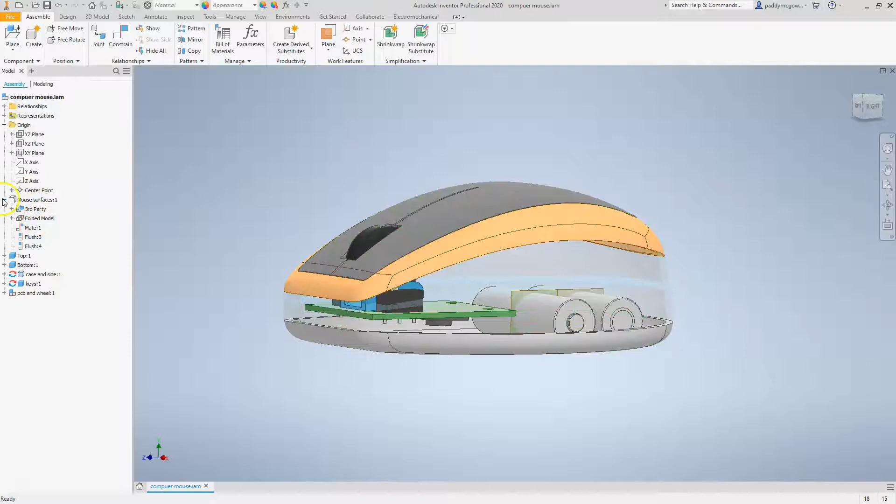You could do it for anything. So just happens that for this one I've got some 3D geometry in there and I've split it apart. But you could just use a master model to share locations for screw bosses, or whatever your project is. It's quite easy and straightforward to add a derived part of a component into another one. I'll show you how to do that because it's quite powerful, and you never know, you might use it in some of your projects.

So let's go into our mouse surfaces here. Let me just hide this off. Oh sorry, I didn't open it. And in here, we've got all our parts split.

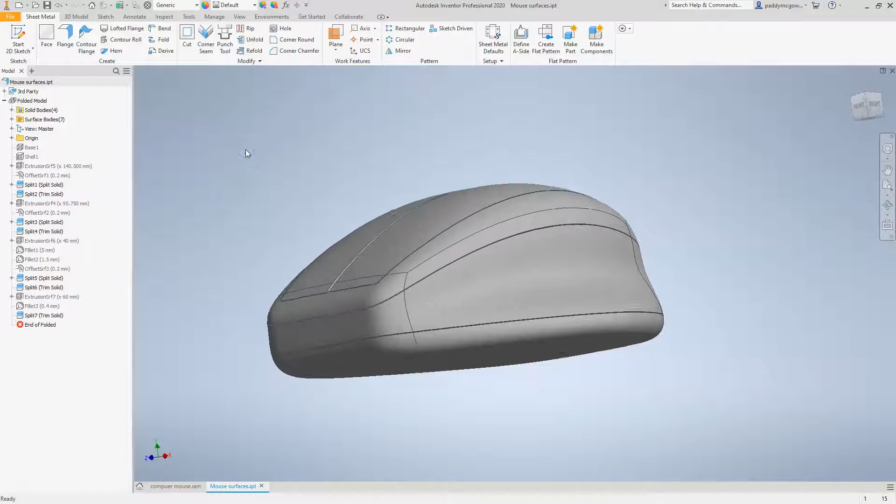I want to come up with some locations for the screw bosses between the bottom and the sides. So let's just start by thinking about the height. Where do we want these screw bosses to be? We need a plane for them to sit on, and it'll all become clear when we look a little further. Let's just start there.

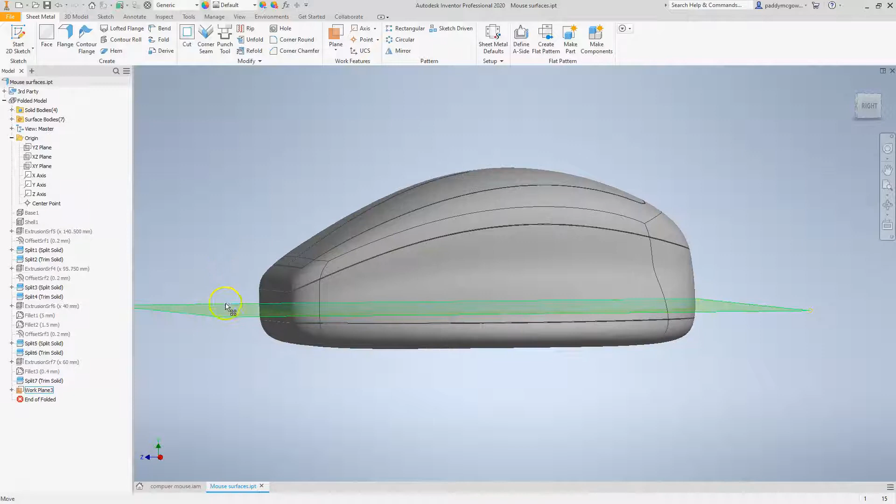Okay, 20 down, let's just start with this. We can always tune this later on. So on there, then we're going to do some sketching, and I'm just going to start placing some circles.

To give me a location for my screw bosses, I'm going to put one there, and possibly one here as well.

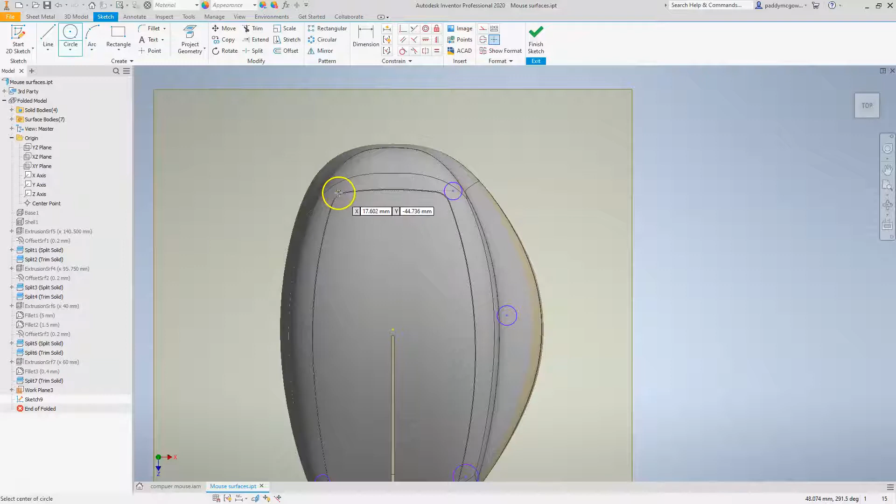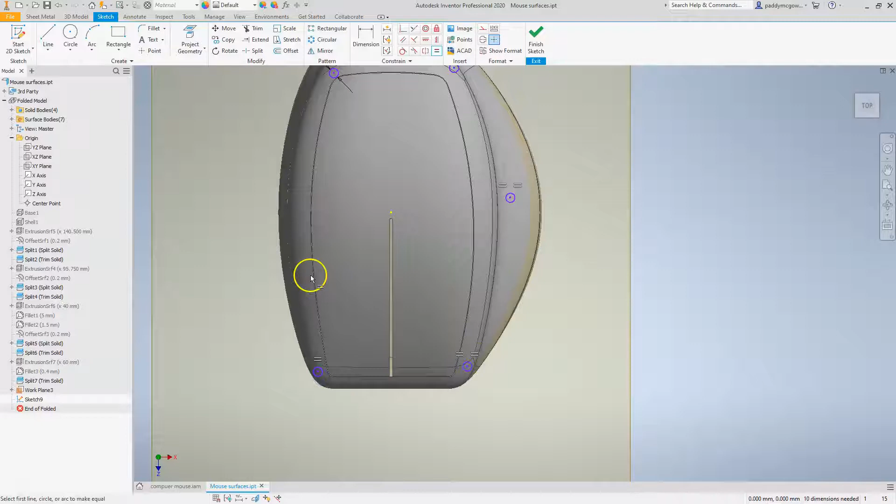I'll actually just make that 3 because I'm going to use M3s, and let's make them all the same, just so it helps me keep track that this is for an M3 screw. We're going to be using M3s everywhere anyway. These positions look alright, quite happy with them.

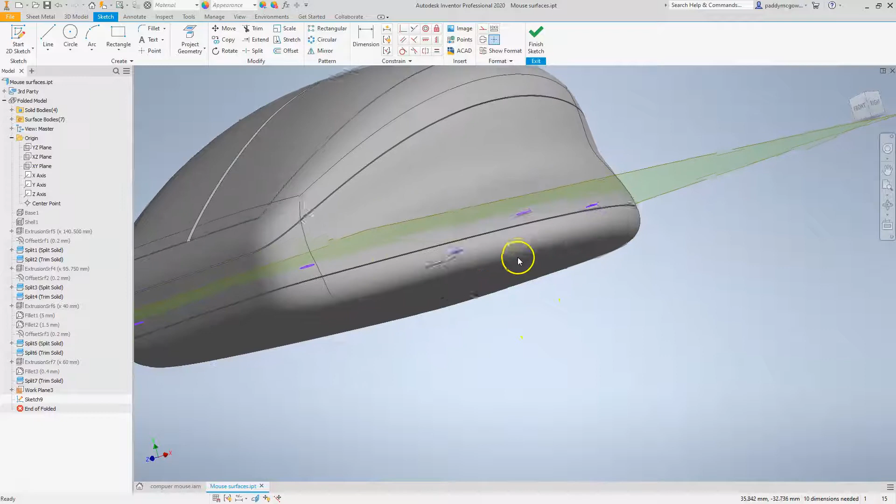Now I don't see any reason to go any further. When we're putting these screw bosses into the bottom, we'll be passing a screw through the bottom, and then screwing into this component. So the hole in the bottom will be a through hole.

And then we need a hole that gives clearance for the head of the screw, so it's not sitting out here, so we don't see it outside - it's sitting inside somewhere. So there's a number of circles that we need, and there's no need to complicate this reference sketch any further. Let's just finish that, and we will have a look.

So we'll have a look here on how we can get this into the other part. Now we need both of these - we need the work plane, and we also need the sketch.

So we're just going to rename this. We'll call this base side work plane. We'll call this base side screw bosses. Okay, so let's just save this.

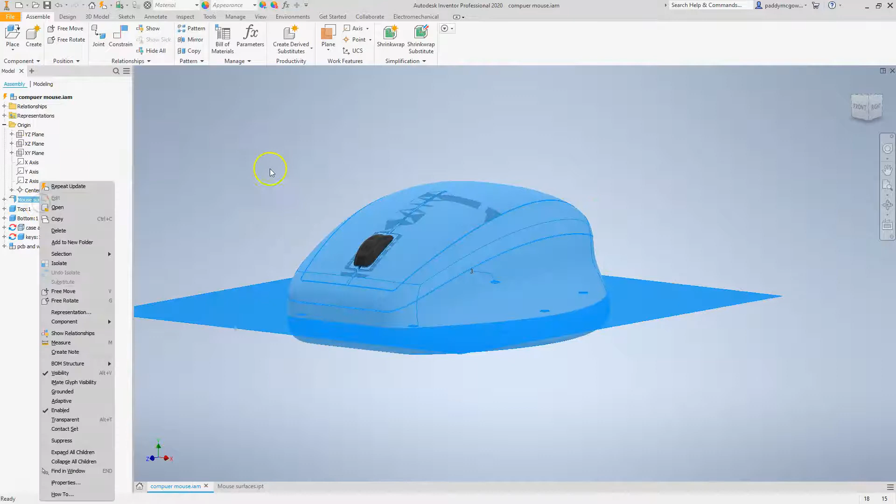And then we go back to our assembly. We can hide off this component here. We can regenerate everything.

Now we want to pull that sketch and work plane into this bottom component. So we do that by just double clicking on here. And now we're in the bottom component. We can see our mouse surface's derived part there.

So we just want to edit that feature. When we go edit derived part, we can see here, this is the solid body that I pulled in. But what we want to actually pull in is the sketches. So we got, this is the base side screw bosses. We'll click here to add that, and we want the work geometry as well, which is the plane.

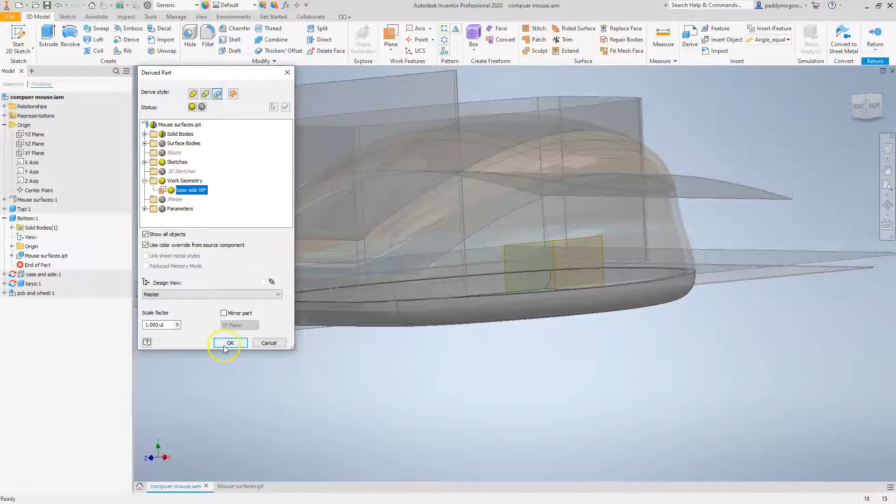So if we just expand that out, we can just click here to include that, and then we click OK. Now I can see them - they've come into this part in the assembly mode. So we don't really need to be in assembly mode anymore.

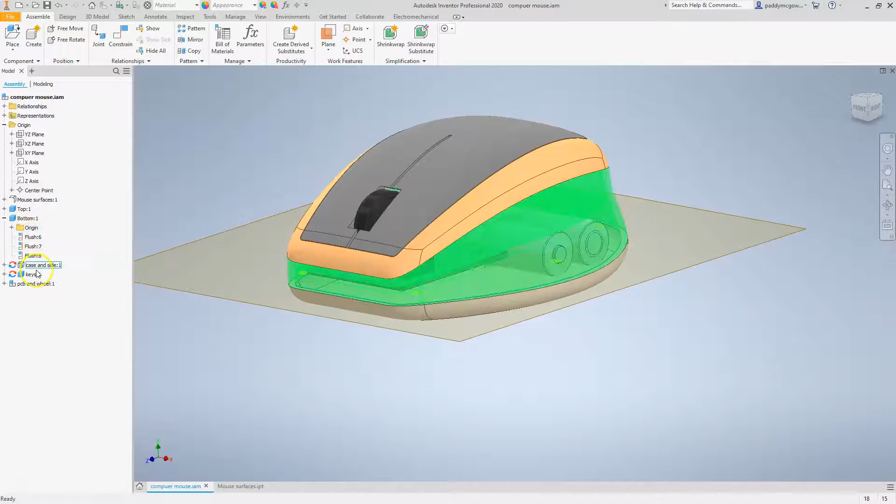So let's jump back and go into the actual part itself, and we can see there is the solid geometry, there's the sketch, and there's the work plane. So let's just start sketching on the work plane.

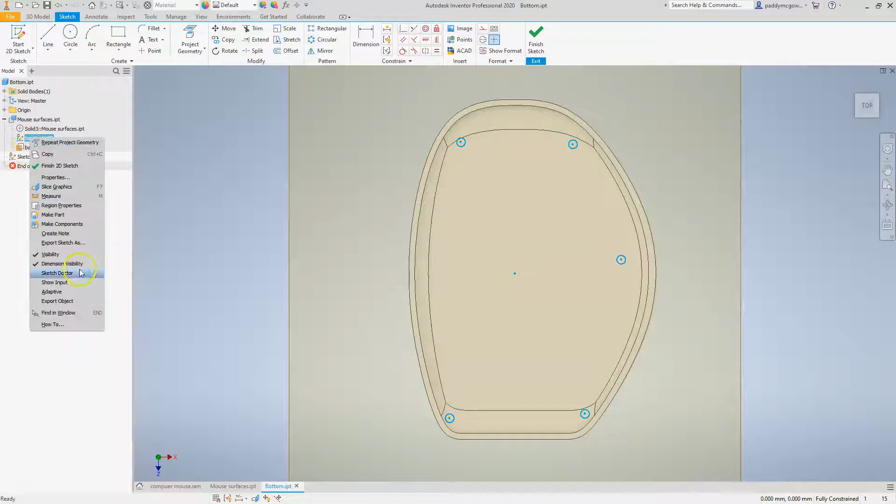Okay, so let's select the work plane, and we will project in the center point here, these sketches. Actually, yeah, we'll go with the center point, and let's then hide that off.

And then we can do our first sketch. This is the hole that the screw will be passing through. It's a 3 mil, so we'll make that 3.6.

Then we've got a hole - the next size hole is for the head of the screw. So I should have added a dimension there, and I'm going to estimate that to be about 6. I think it's 5.6 for the head of that screw.

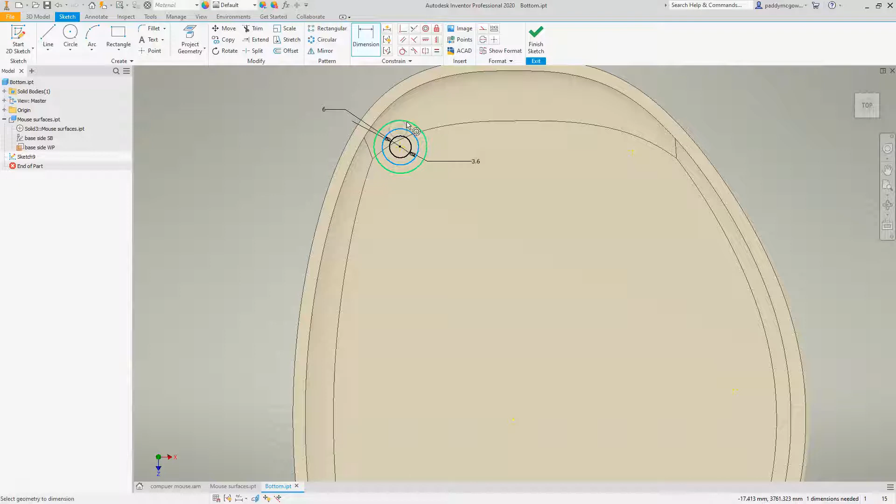And then we want the actual screw boss itself, the actual cylinder, and I want that to be 1.5 millimeters bigger than the circle for the head of the screw. Okay, so let's then recreate that at all of these points.

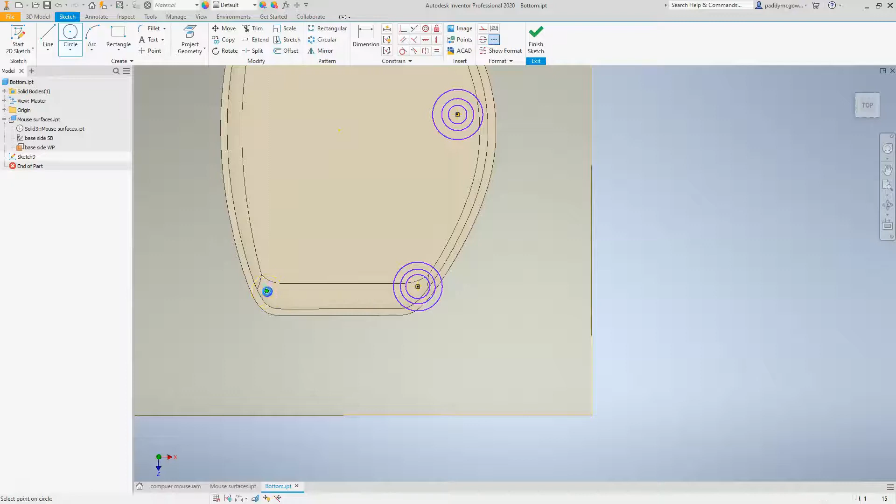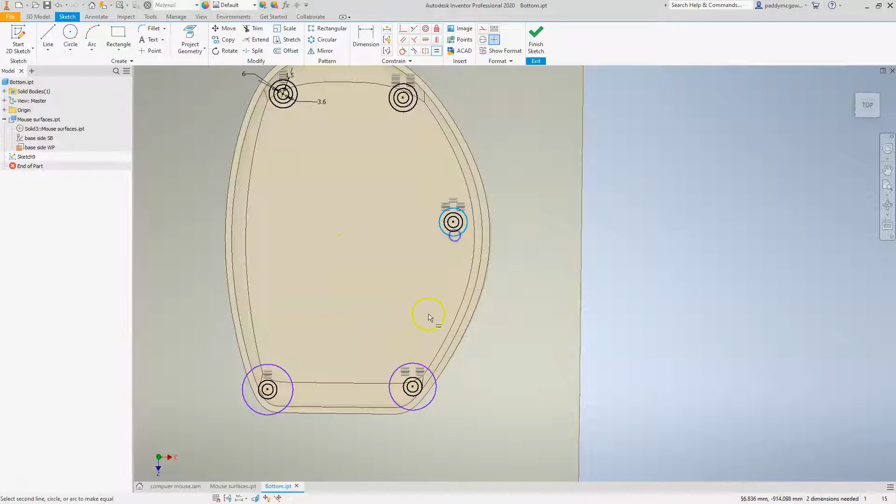There are other ways I could create this feature and add it as an intelligent feature, but you need to have that locked down, and we're still in the design process and don't really know what we want. So let's keep it simple - this is perhaps one of the easiest ways of sharing geometry around, through that master model technique. There's another way as well which we'll look at. Let's equal these all up and start making features.

Okay, so there's our sketches done. Now we can see we've got some issues straight away, and we should probably tidy those up. So this one seems okay, this one's not too bad. They're all a little bit too close to the edge. This one's probably the only one that's okay.

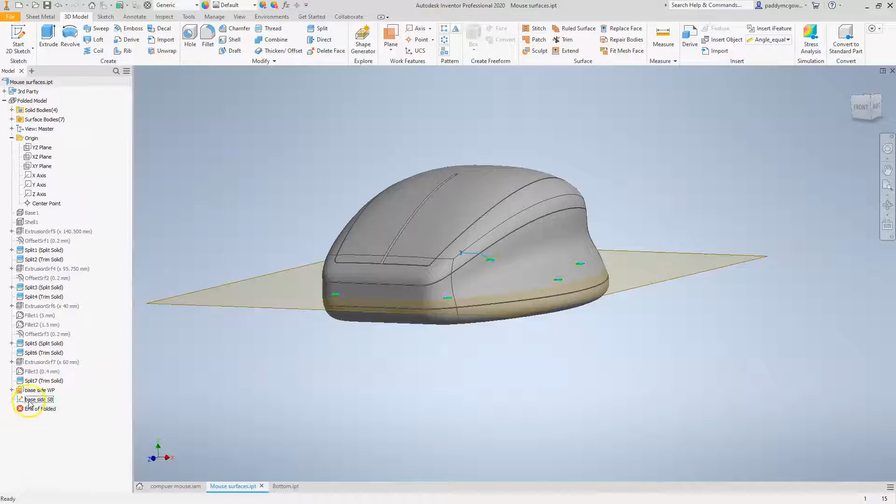So let's go back to our surfaces and open up our sketch here. Let's look at it from the bottom - might give us a better perspective. And let's just pull this one in, maybe go a little bit further actually.

We're going to start encroaching on the PCB there, but that's fine. Let's do the same there, pull these in a good bit. And let's just do that one a small bit more, just for good measure. Okay, and let's hit save there.

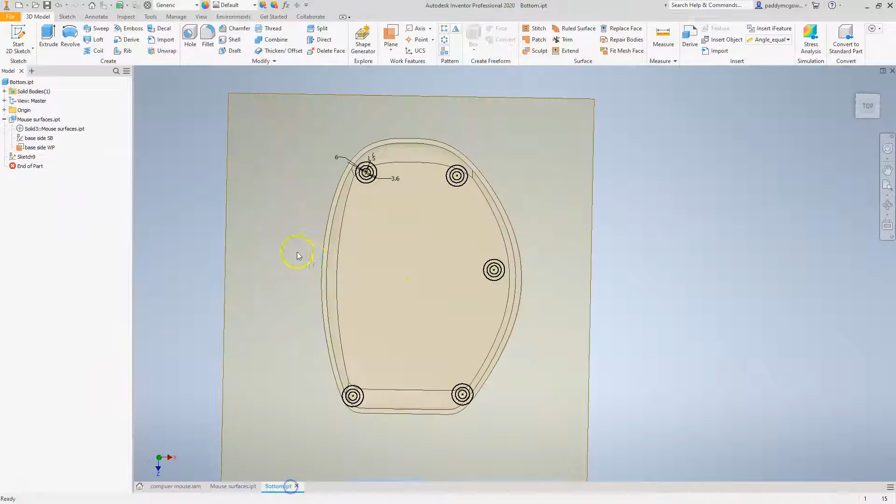Okay, back to the bottom, and we can regenerate this part. See those screw bosses have updated position, and that's looking a little bit better. So let's start extruding some geometry now.

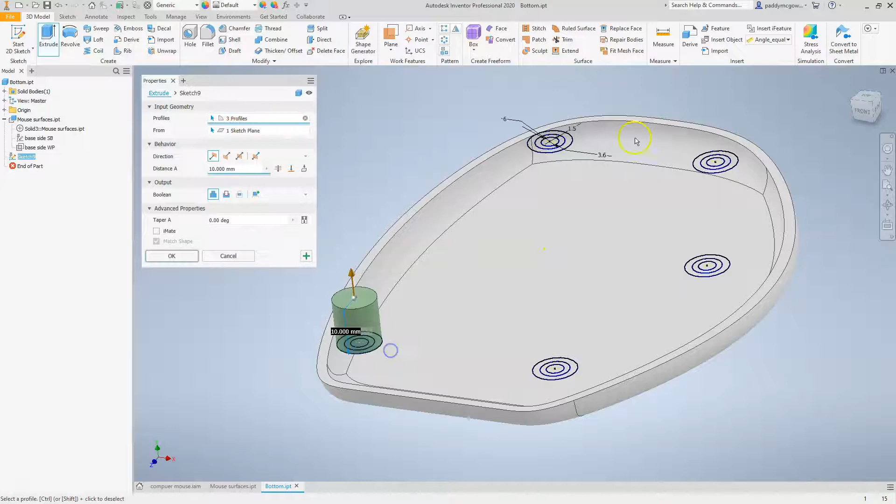Let's hide off that work plane. So let's go to extrude, and let's start off with the outer ones first. We'll create the actual cylinders, going the opposite direction through to next. Let's keep selecting the outer circles - make sure you select the circle and not the region, because otherwise you'll have to select a number of regions. Select the actual curve.

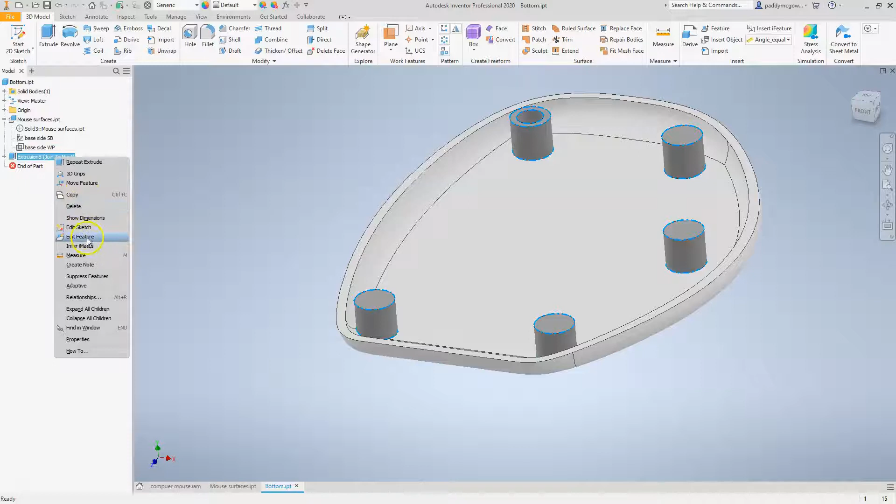Click OK there. Okay, so you see I've selected the region there on that one - let's change that. If I hold down Shift, that will allow me to deselect that and then select that curve.

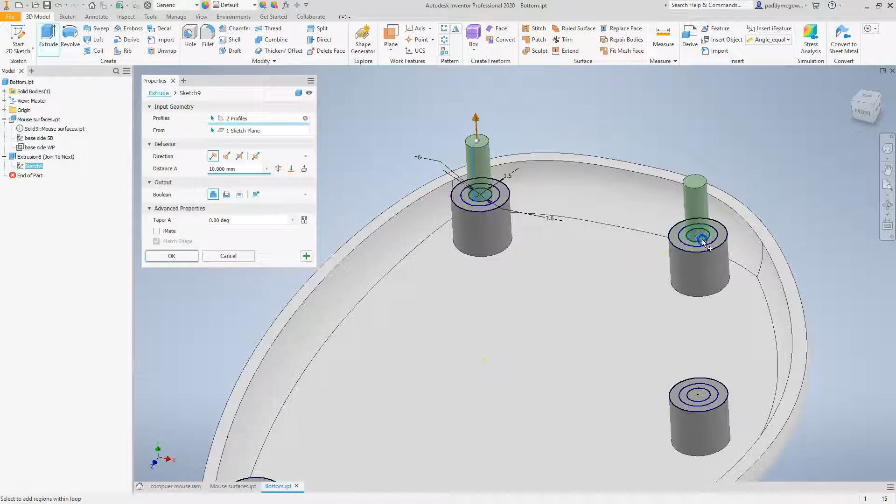Okay, let's just turn on the sketch again, and this time let's do the through hole for the actual screws themselves. And we're going as a cut through all. Okay, so there we go - we can see that through-all cut.

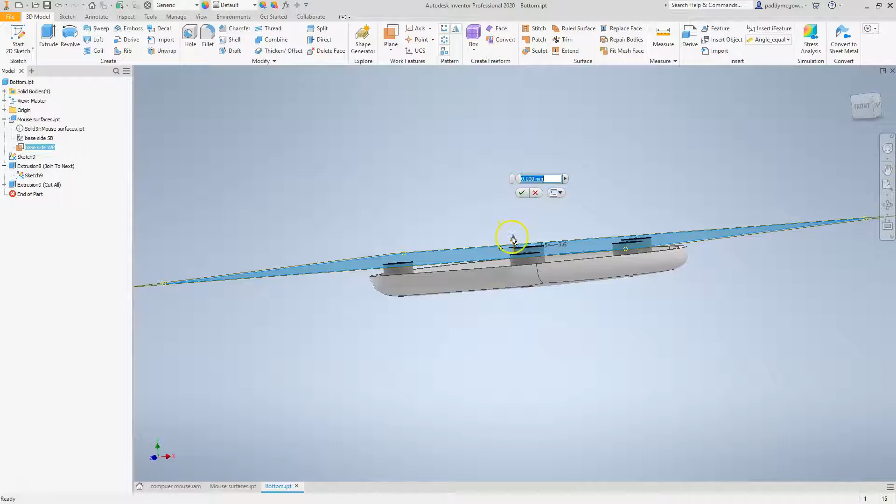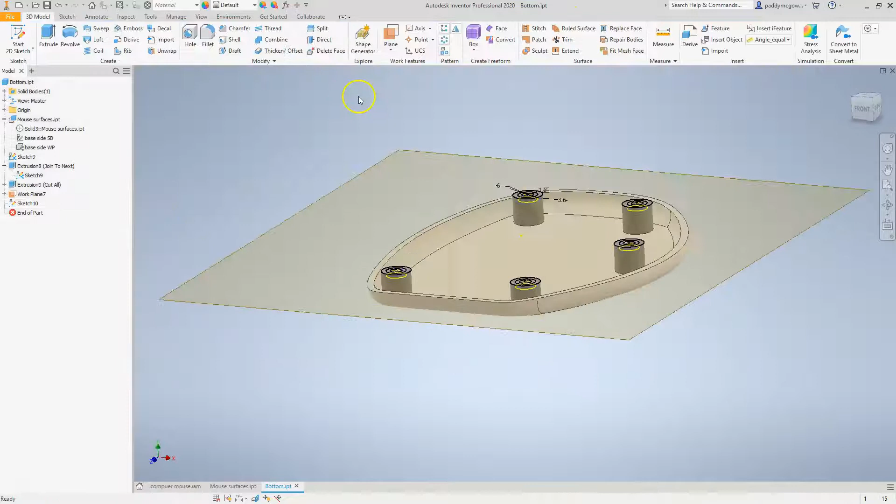Now we're going to do this guy here, but we want this to start 1.5 millimeters down. So let's do an offset surface, 1.5 mil down that direction - so minus 1.5. Hide that one just so we don't get confused, and then sketch on here, and we can simply project in those curves, because my settings make it solid geometry and not construction geometry. So let's hide off that work plane, and we can then hide that sketch.

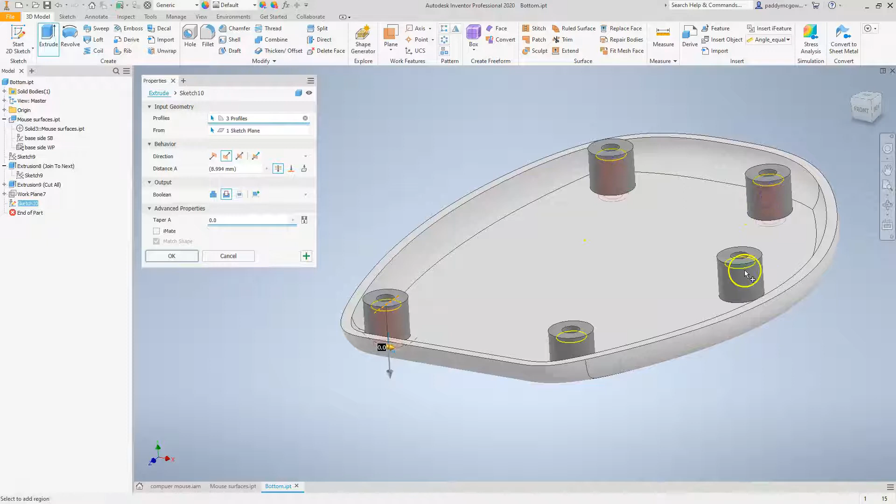So now we want to do an extrude using these curves. We're going to cut the geometry away through all. And there we go - now we've got clearance for the screw head, clearance for the screw body, and we've got the actual screw boss that everything sits on. If we have a look at a cross-section view, you should see that's a nice consistent thickness all the way up. So if we're 3D printing this or injection molding it, it's looking good.

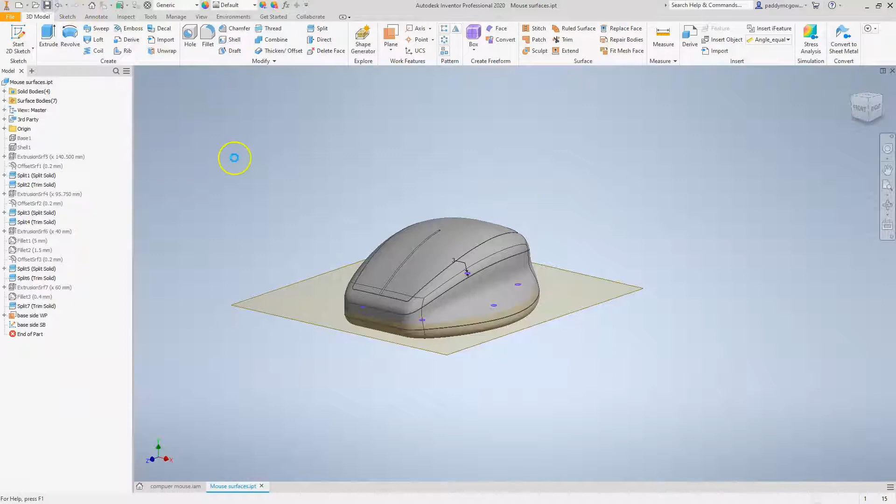All right, so now that's the geometry recreated on the bottom part. And I've just realized I've accidentally managed to turn this into a sheet metal part, so I'll just convert that back to a normal part. Must have accidentally clicked that somehow.

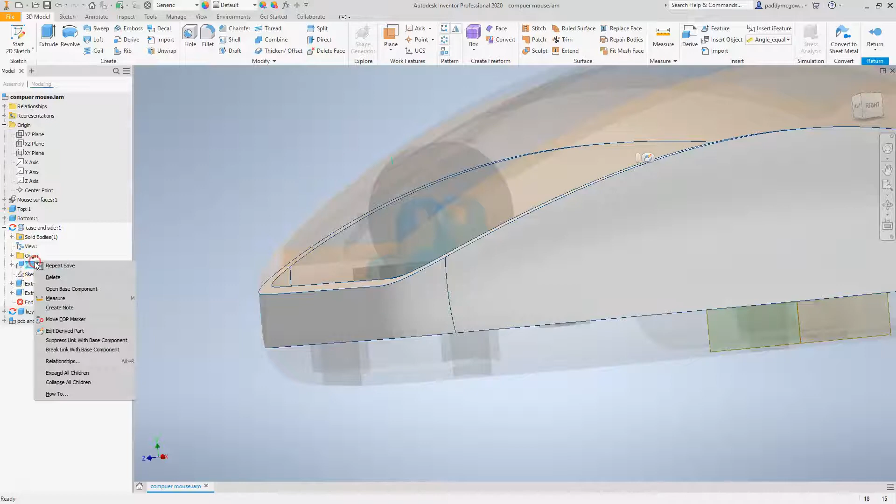Okay, so now we want to replicate those features on the side. Let's go through the same process again - we'll double click there, and we will edit the derived part. Actually, let's do it in the actual part itself, because I think last time we did it in the assembly. So this time, let's just open that part and edit the derived feature there.

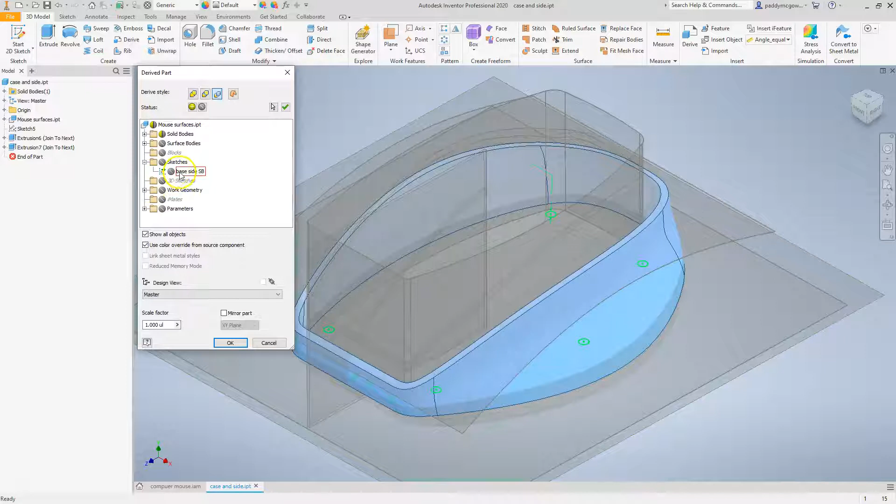And we want to include the screw boss sketch and the screw boss work plane. So when we click OK, we'll see those pop in for us. Okay, so it's really quick, really handy.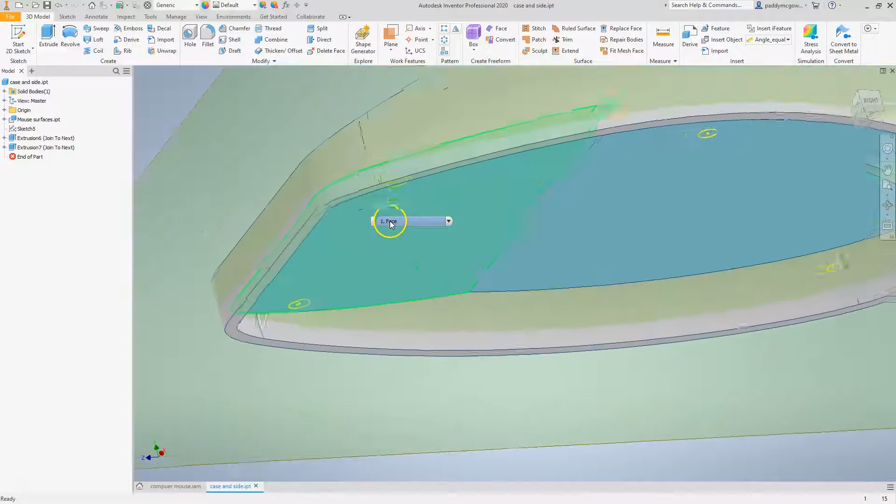Okay, so on this one we are going to be screwing into this, so we need a hole. This is 3 millimeters, so this is too big. So we need a hole that's going to be small enough to allow a self-tapping screw to actually start biting into the plastic.

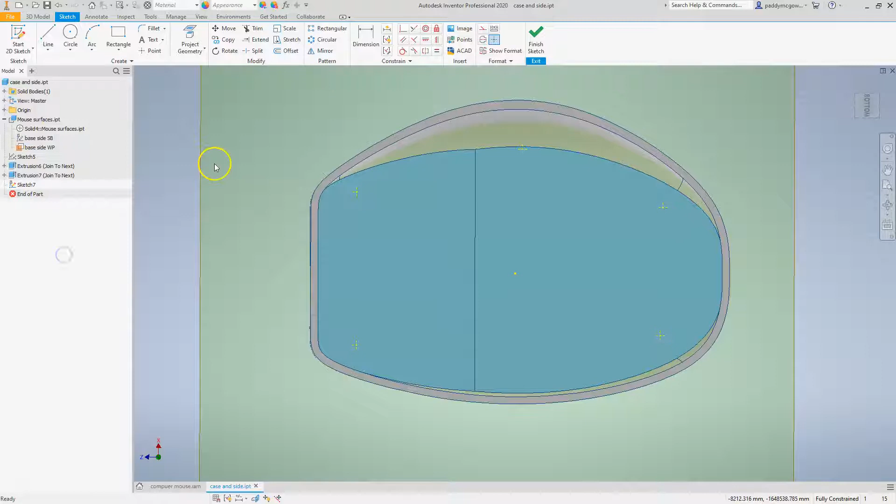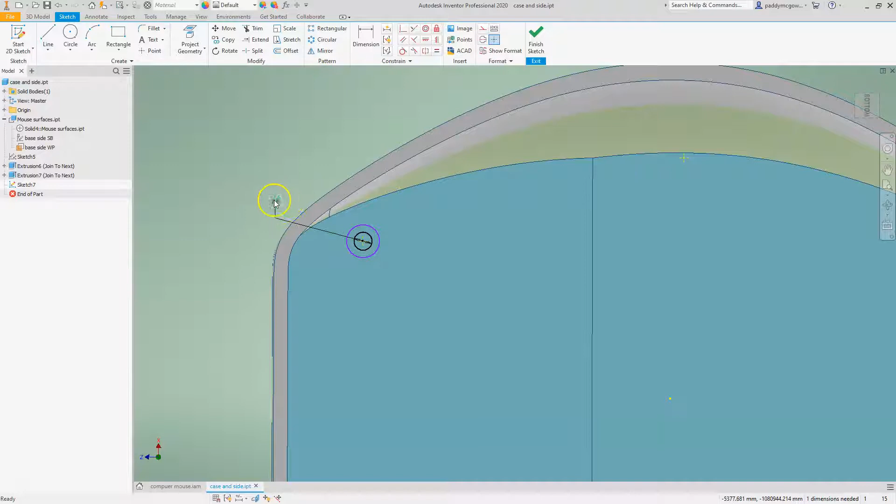So we'll just reference the center points again, and then we can turn off that sketch that's in there. So just two circles this time - sorry, I should have entered the dimension there. I'm going to make that so it's about a 3 millimeter self-tapper, so I'll make this about 2.6. Sometimes this is a bit of trial and error getting this right if you don't have data from the manufacturer, and even if you do, sometimes you need to try this out in different dimensions.

So then this is the hole, and I want the actual outer of the cylinder to be 1.6 millimeters bigger. So let's go ahead and model these at the other locations. Okay, so we'll add in our constraints, make them all equal.

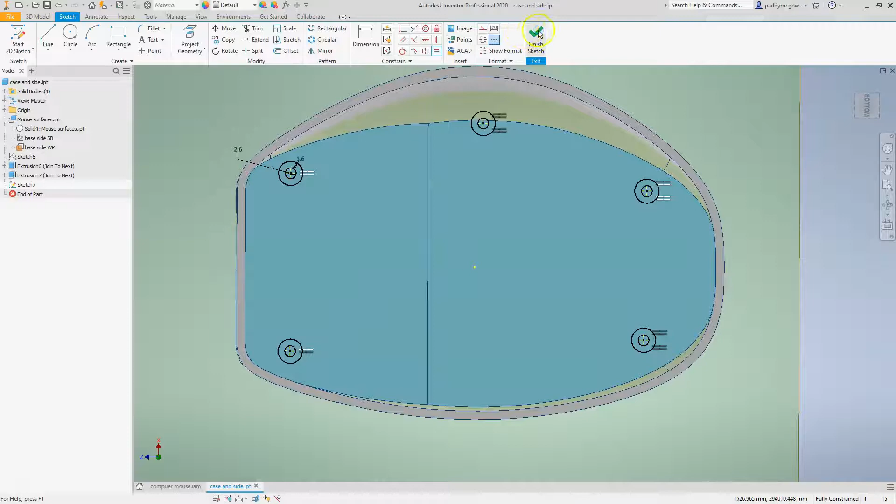Now we can hide that off for now, and let's start extruding these out. We'll do the outside first.

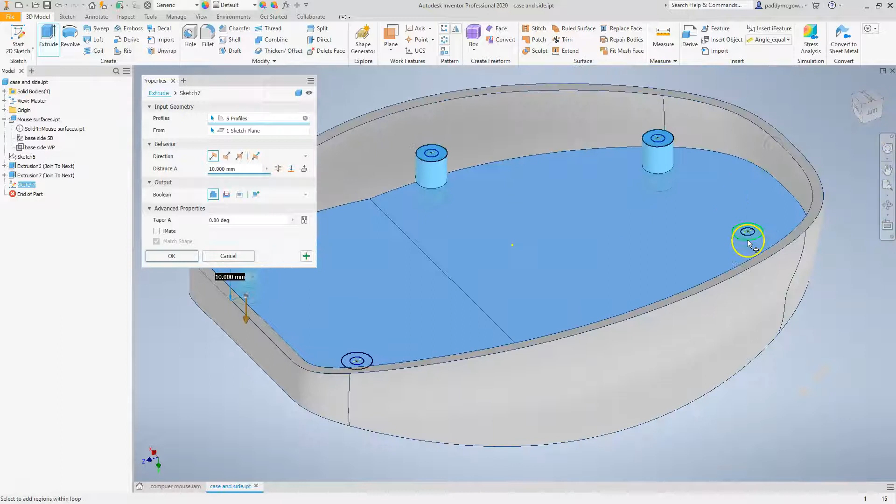Okay, we'll go up to next. So this one kind of joins on here a little funny, so we need to be careful. Now we're doing a cut through there. We don't want it to break through this surface, so we'll see where that lies. I've selected a region again, so let's just fix that first.

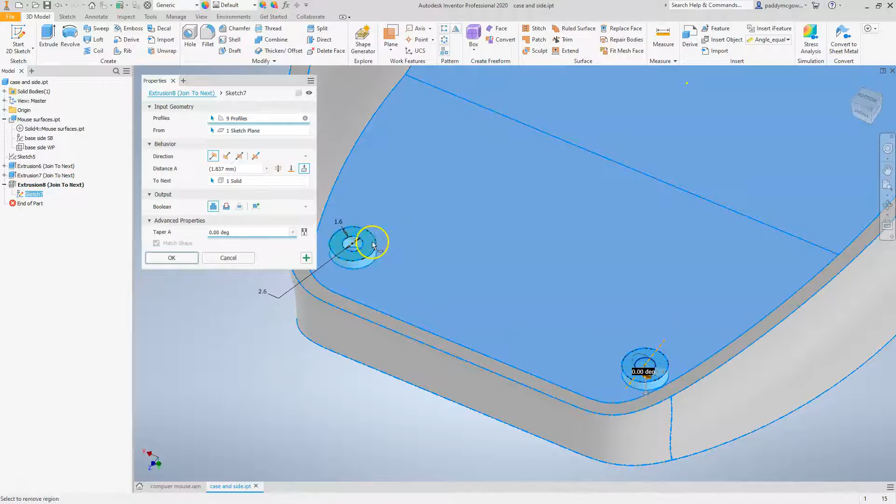Hold Shift, deselect that, and I can select the sketch. Okay, then let's do the holes. And it's a cut, through all.

I can see that is going to cut through, so I do need to move that. I could do other things to make this sit properly over here, but we don't want to get into that. We just want to go through the processes. So we need to move this, and we probably need to move that in.

So this wall thickness is about 2, that's roughly on the center. So if we move that in maybe 4 millimeters, we'll start adding a dimension to that.

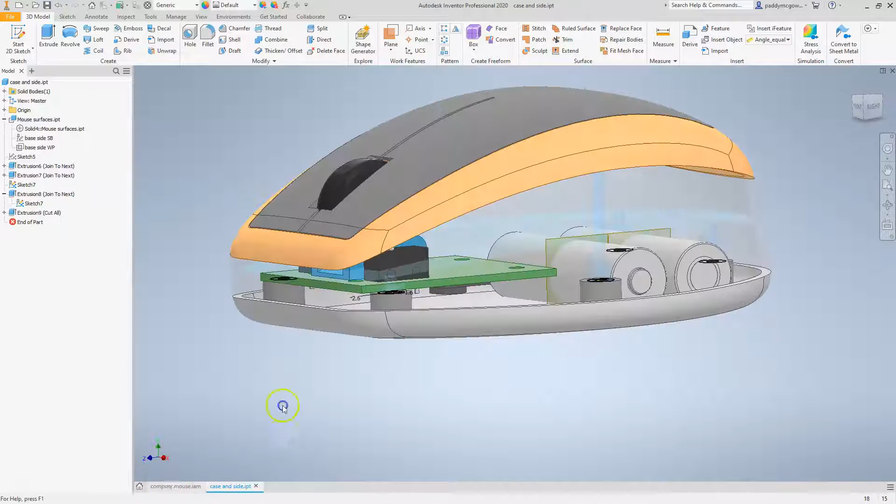Let's go back to the actual driving part, the master model as I'm calling it, and we'll go into our sketch. This time we're going to add a dimension here, and we will add this one in first. I'm not even going to change that, I'm just going to leave it as is.

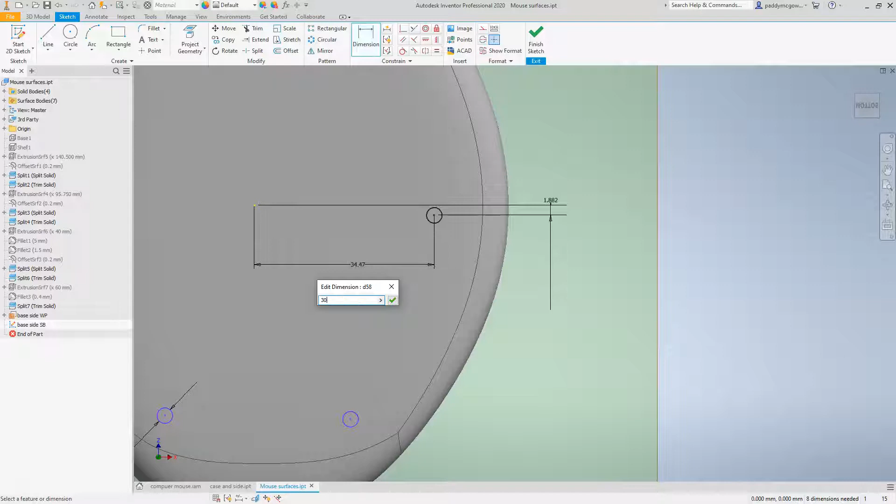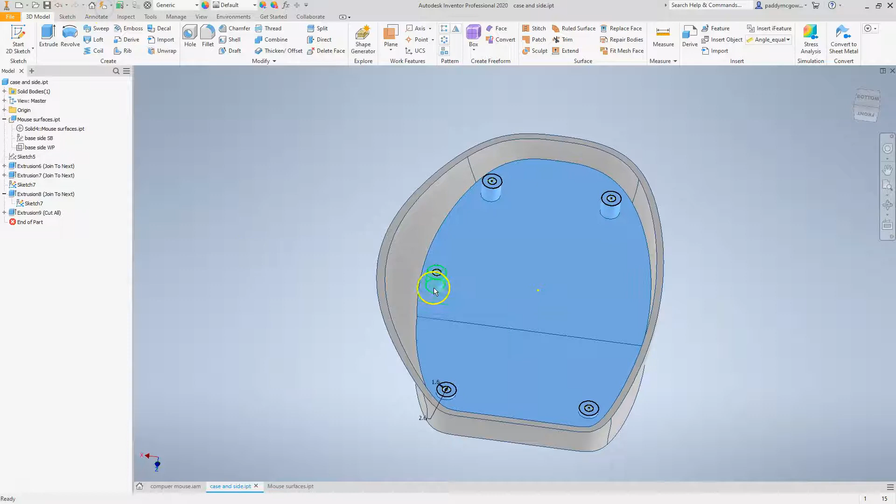As I keep saying, we're just in the process of designing, so 30.5 should move that in by 4 millimeters. Let's hide that off, and also hide the sketch, and let's save that. When we go to the case and side and regenerate this, we should see that pop in, and that's coming through nicely there. Okay, so that looks good.

We just need to double check on the base, because this will have moved the base as well. Let's regenerate there, and we can see the base is now lined up. So let's take a look at these parts.

Let's get rid of the transparency on there, and let's take a look at a half section going through those screw bosses. Okay, so there we have, so the screw's coming in from here.

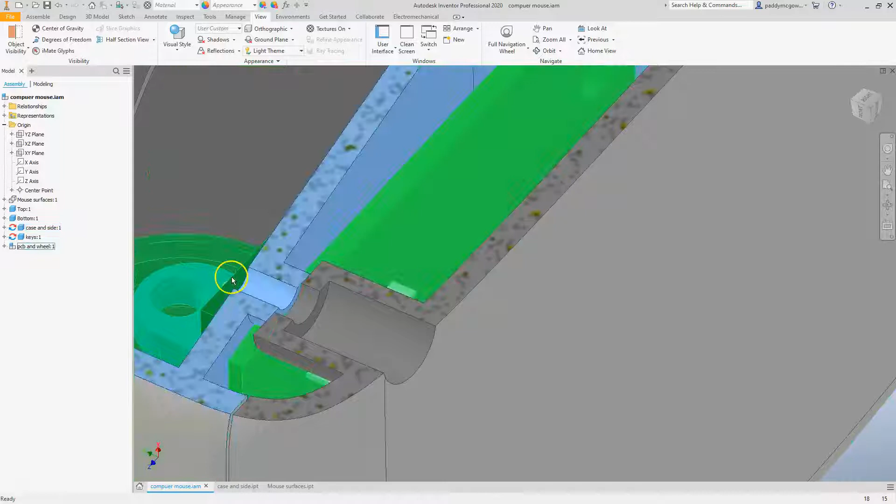I'll add it in a sec. It's going through that hole here, and then it's going to start chewing into that, so it's screwing into there. So the head of the screw will sit here, and it'll start pulling that towards there. So we have a nice little arrangement there for screwing these two plastic parts together. It means the head of the screw is nicely hidden, and we've got some nice internal interfacing geometry here.

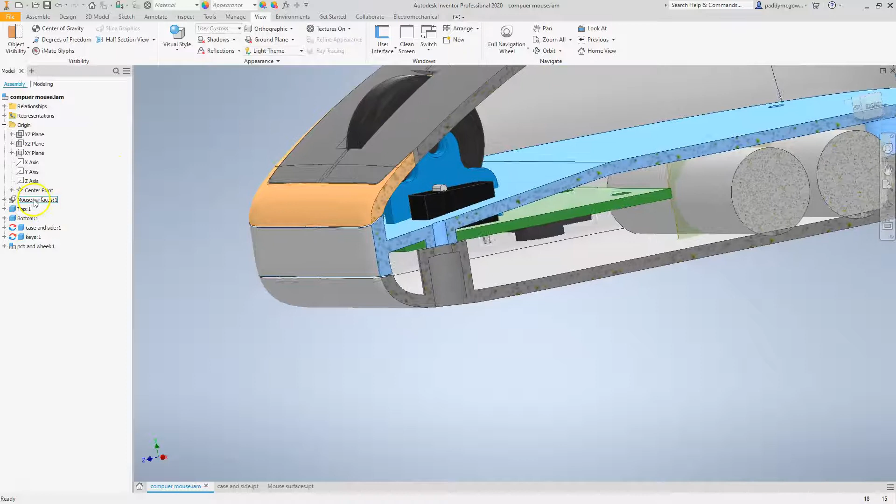And it's all controlled off here, so we can start moving this around if we wanted to. Let's say it was a little bit too high. Let's double click that, and we wanted to just drop that down.

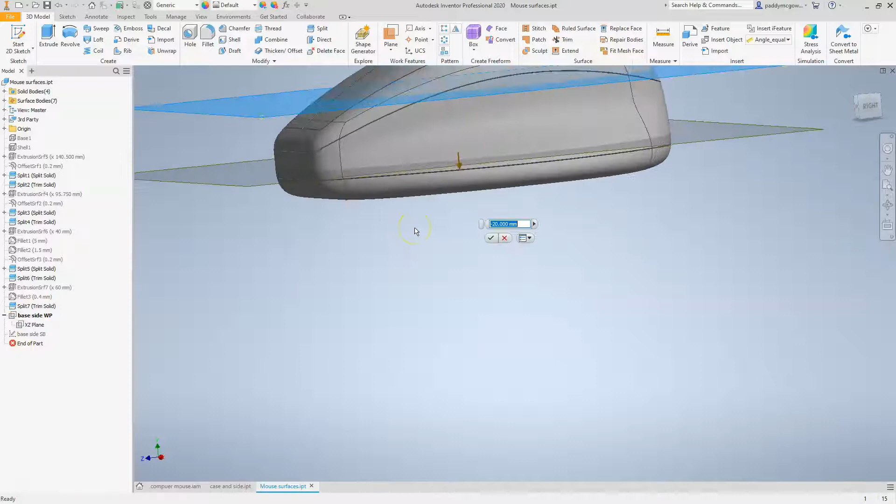Let's say we wanted to just go up a little bit by an obvious amount. Okay, and we go back to our assembly, and we regenerate these, and we can see everything pop up.

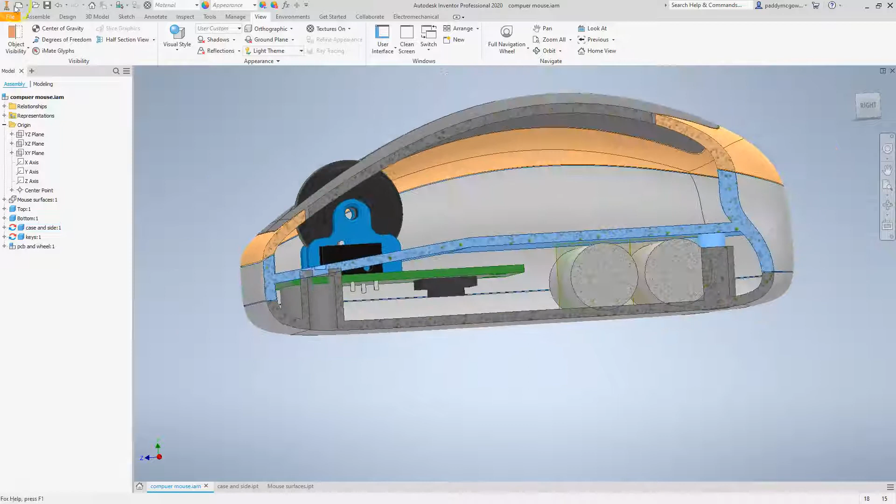Now it's causing an issue here. We don't want that, so let's pull that back down. We had it in a really good spot. So let's just go back in and change that.

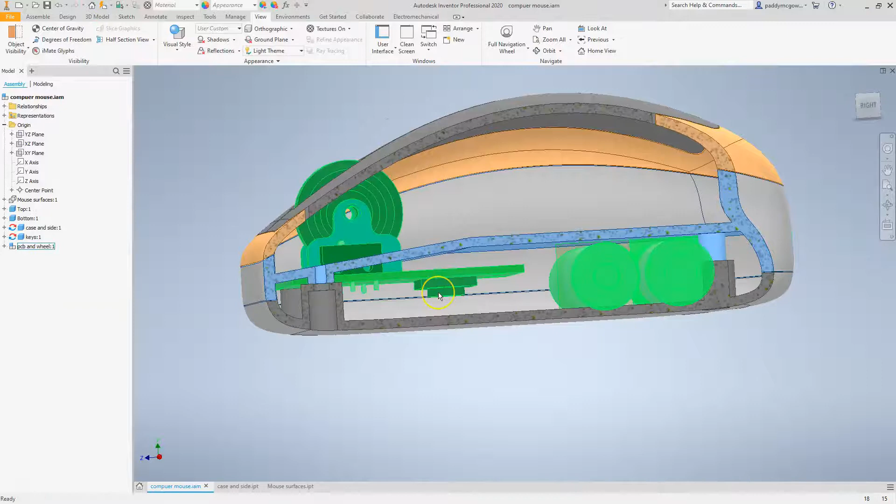Okay, -20. But you can see now that there's a really good, nice, solid relationship between all of them, and we changed the position on them as well to move them in and out. So we've got total free reign to start doing that.

Now we can see we've got some interferences. It's okay, we can deal with that a little later. Okay, so that's some screw bosses.

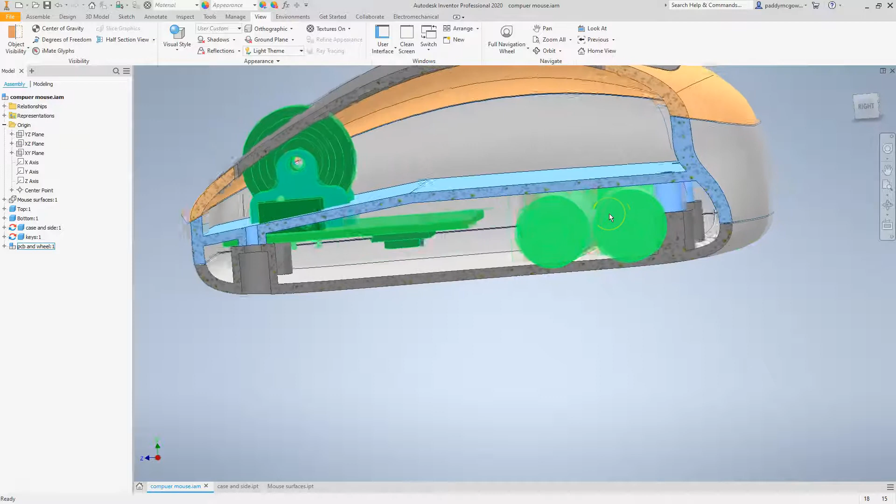And now I think, so we can see we've got some interference here as well, so we need to reposition the batteries a little bit, but that's fine.

So now we need to let's put in some clearance of this component around the wheel. But first of all, because we're hitting off the PCB, let's just raise that up a little bit. Okay, so let's edit that part.

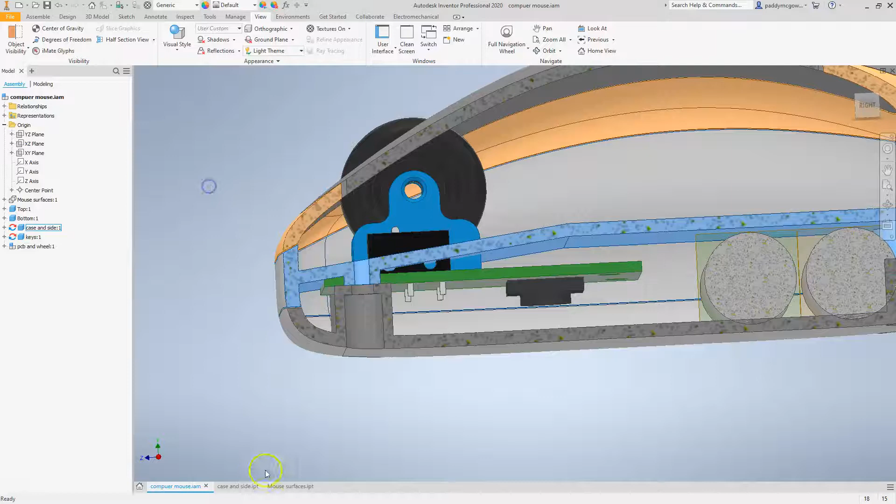It's not going to do it because I've got it open. Okay, so let's just edit that. And it is this extrusion here.

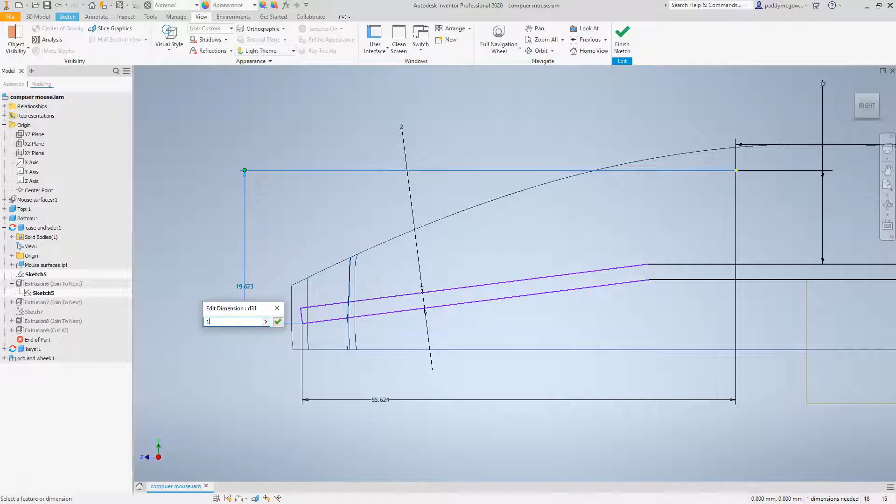So we'll just go in and edit that sketch, and we can just turn it wireframe, just so as we can see. And then let's raise that up. So the PCB is 1.6 millimeters. So let's just bring that to 17.5, possibly.

Okay, let's see what that looks like now. Okay, so it's gone a little bit too high. We could probably bring it down a little bit, but that's okay.

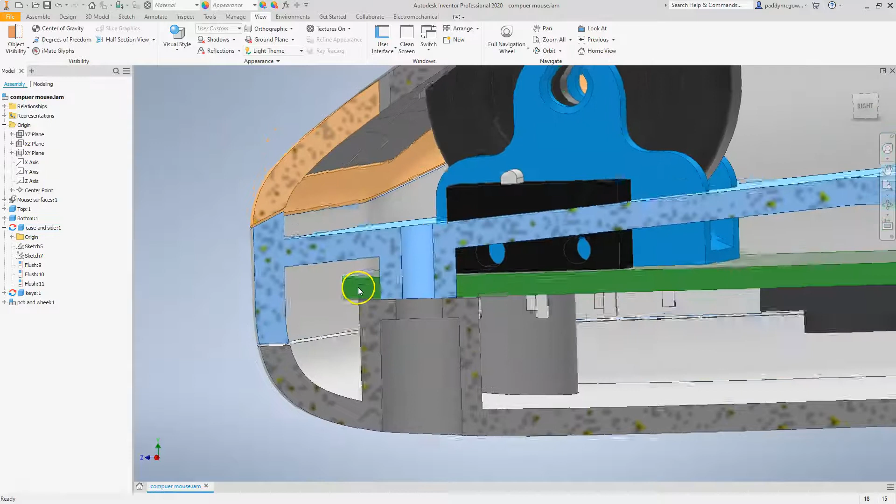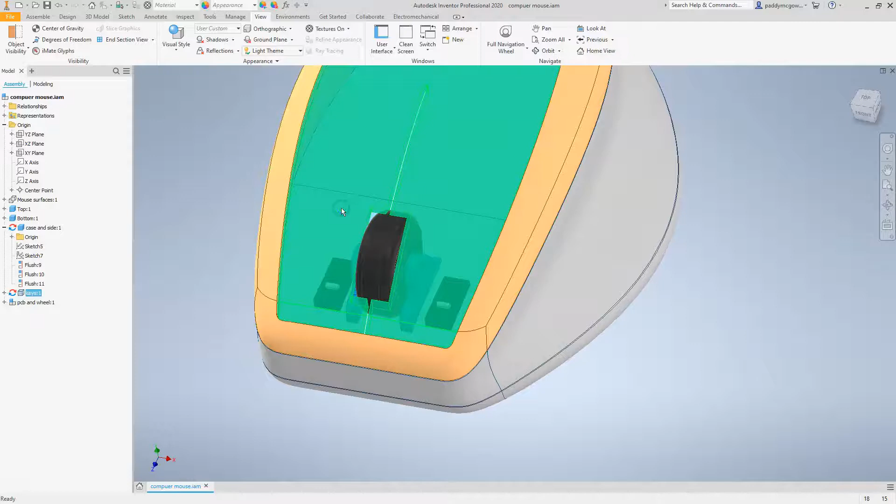So let's get out of that half section view and turn that transparent. And now let's add in some clearance around the wheel and the switches, just so we have clearance there, no interference.

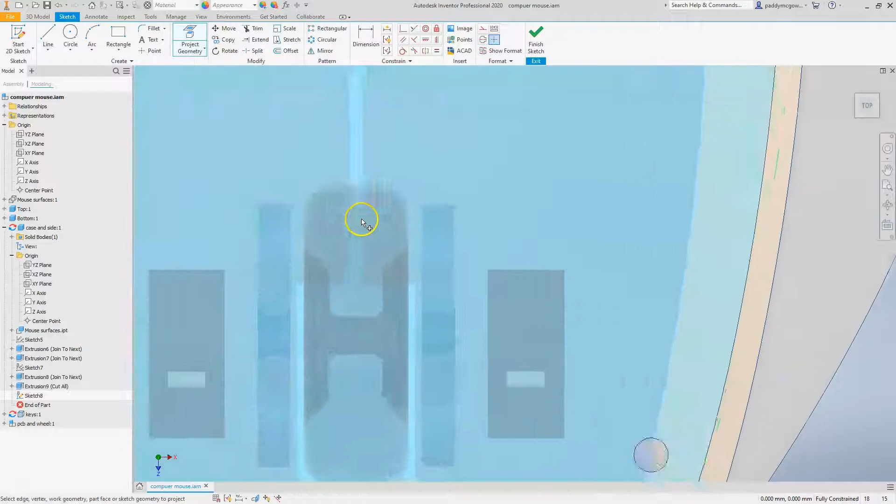Once again, let's go to the case and side and edit it in context. I don't think we need to create any new plane, we can perhaps just sketch on this plane. Okay, and to make life easy for ourselves, we can pull that in.

Let's pull in that edge, that one, and let's do the same for these switches.

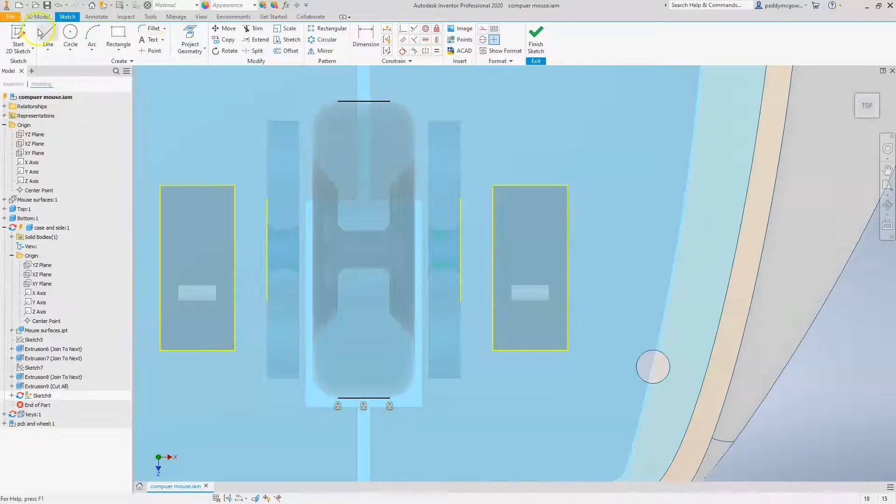Okay, so I think we really just need a rectangle, I think would be the simplest. So let's just start doing that. And let's do it by 0.5, probably the smallest that I go to at this stage.

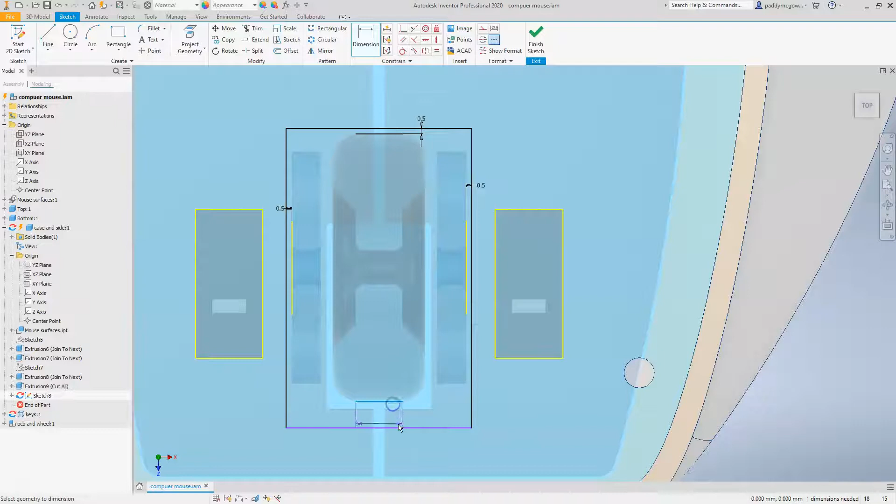Okay, so once again, you're still in the design phase, you're just figuring a lot of this out. So there's no need to be accurate first time. We need to keep an eye on this gap, this is an obvious one.

So we just pulled in this full surround geometry, so we can actually just offset that really easily. Let's offset that by 0.5 also, and then this one by 0.5 too. And let's just add in this dimension, so we've got 1.5 there. That's okay.

That's fine, that's okay for this level of prototype. So we're still in the parts. Let's do an extrude, we want to cut the material.

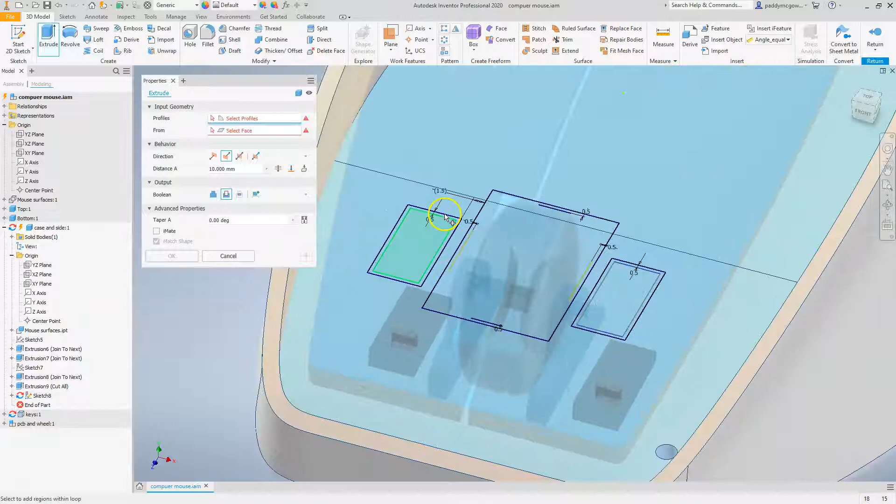Let's start off with these guys. We're going in the right direction, we want to go through all. We want to do that as well. Oops, not that one. Five profiles, let's just start that again there.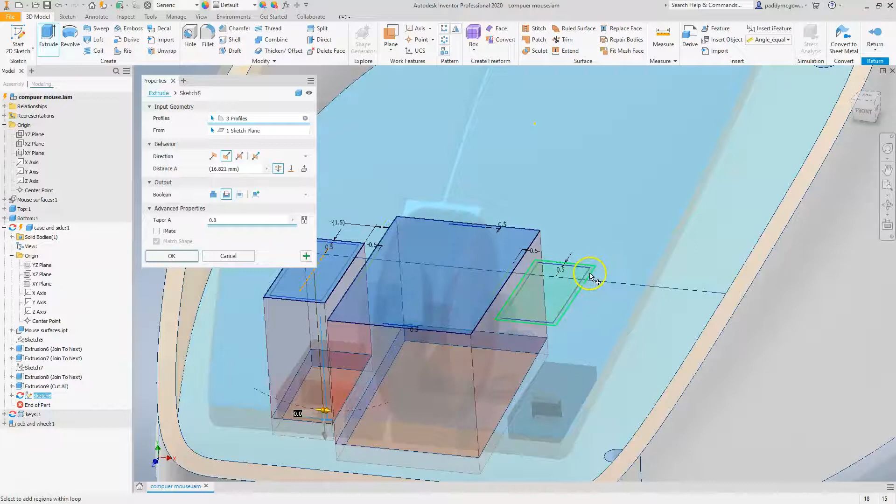There we go. Okay, so now we have a nice clearance around those parts, and it's related to those parts. So once again, if I start moving everything here, I'll see these update with me.

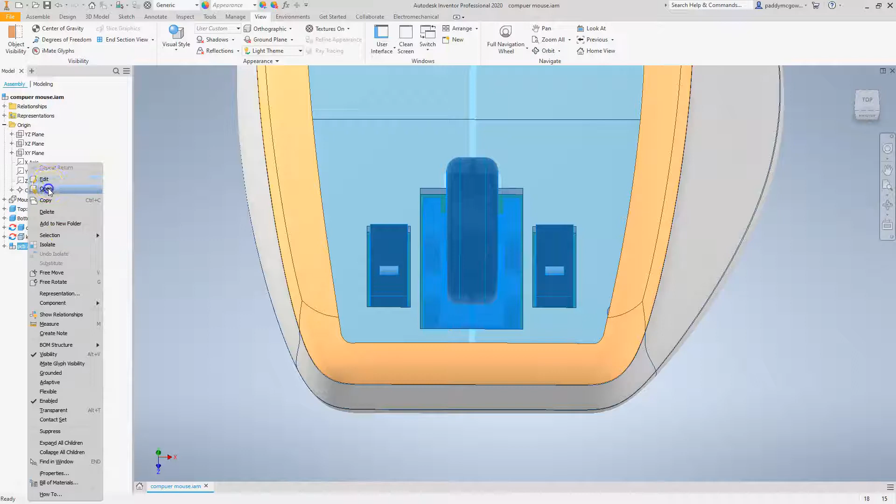So let's just do a quick change so we can see it. And let's move these switches, let's see, we have them at 10. Let's just move them out to 11, just so we have a little bit more space, a little bit more land on that actual piece of plastic that we were just keeping our eyes on there.

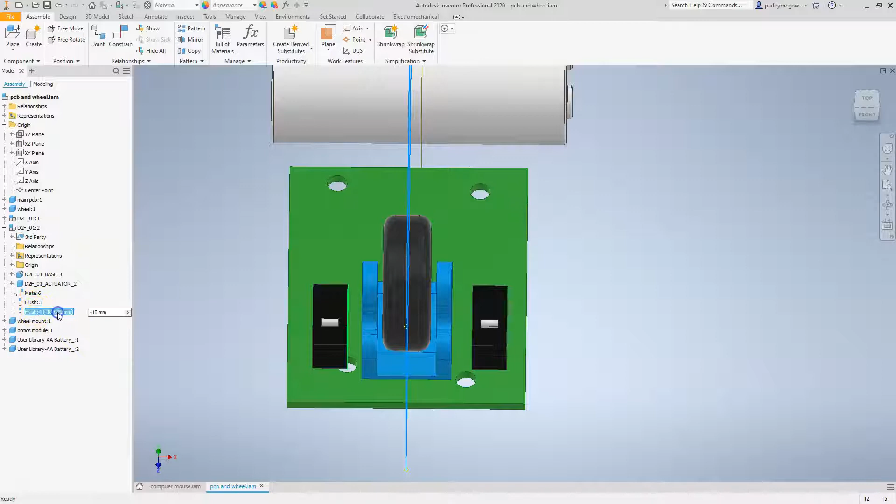Okay, let's save that. We can see them moved. Let's regenerate, and we can see our sketch goes with it. So we got a nice relationship there, nice and simple, keeps track of that for us.

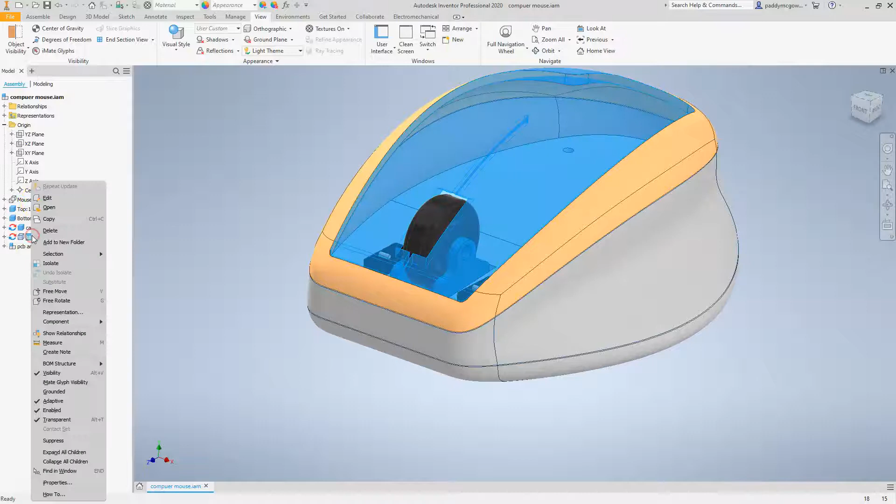All right, sorry. Turn that visibility on, just turn the transparency off. Okay, so let's see, that's the screw bosses there, and the clearance around the wheel in the internal module.

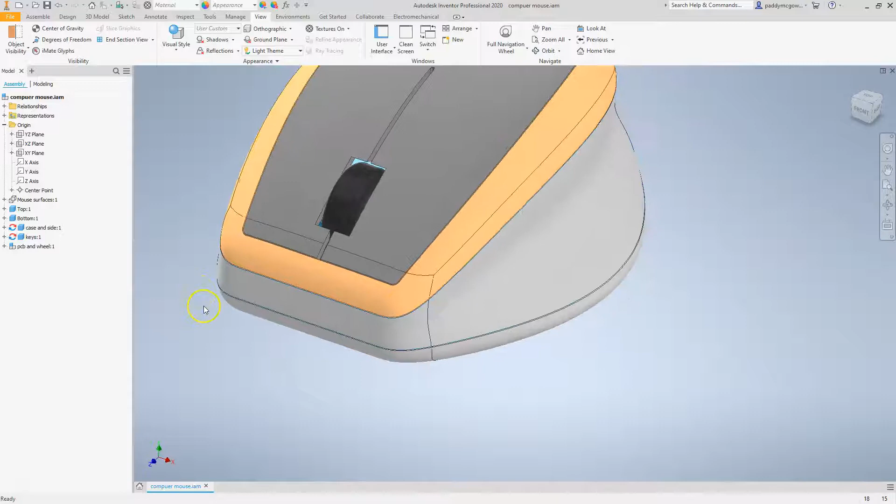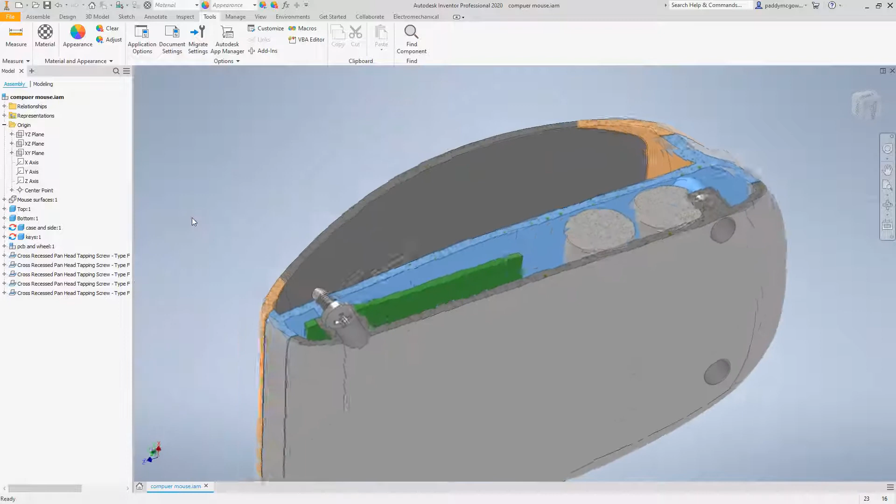So I just skipped a little bit further ahead, and I added in some self-tapping screws here, and I went for, let's see, what are they? They're 8 millimeters long, could be a little bit too long, but I'm going to leave them in for now anyway. One thing we do notice is that the heads are a little bit bigger.

So this head is diameter 7, and I've gone for, I think, a diameter 6 here on this, so I'm just going to increase that up. I'm going to go to, I think, 8. We'll try 8 on this.

Okay, so if we edit that part and we come into our sketch here, oh sorry, the wrong sketch. We actually referenced that sketch to the earlier one, which is there, sketch 9. And let's see, so there it is.

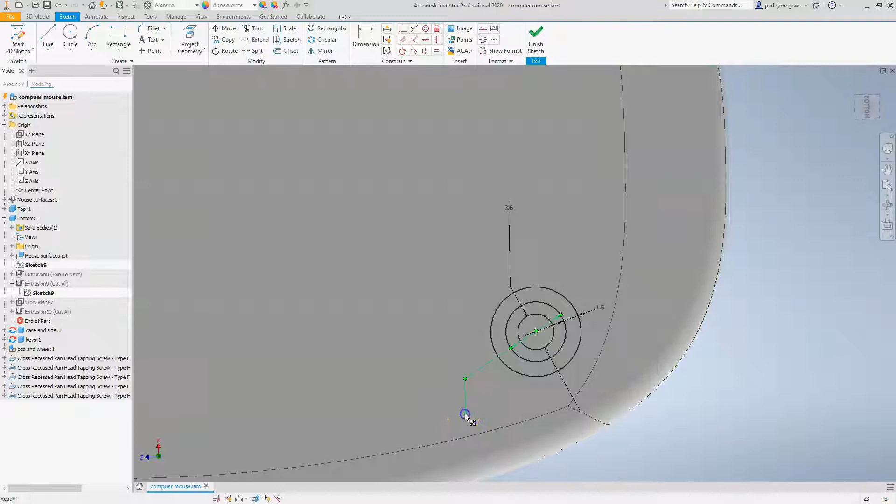That's our 6 millimeter, and this is going to go bigger as well. So this outer one is going to go bigger because it's 1.5 out from there. So let's do 8, and we can see it's gotten considerably bigger, but that's okay.

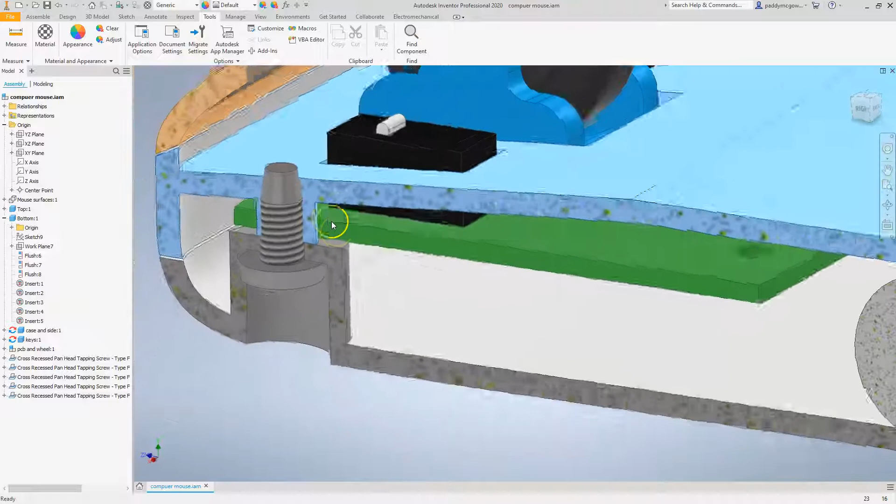We're not going to go searching for the right screw, not just yet. So we can see now that this boss has gotten quite a bit bigger. There's probably a little bit too much clearance around here, but that's alright, that's okay for now, it's okay for this one. We can manage with it.

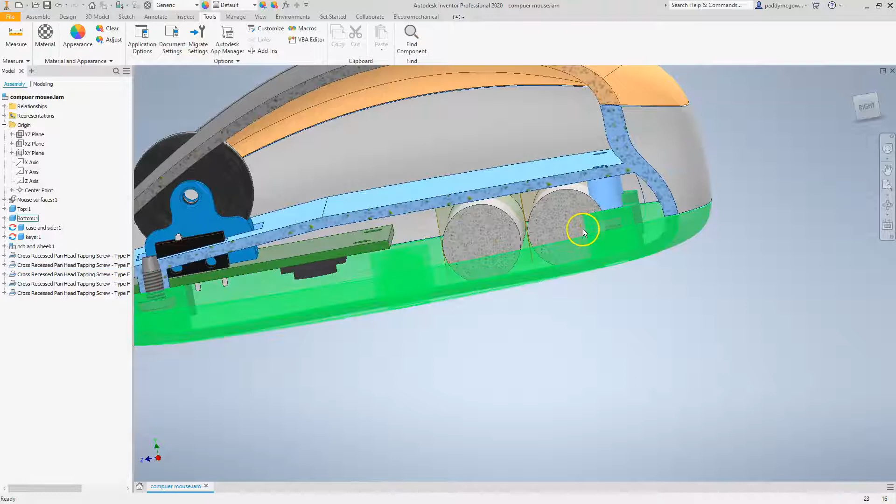Okay, so let's just move these batteries back a little bit, and to do that I need to just go, so this is 8 millimeters here, so I think I need to move that by about 10 millimeters back.

Okay, so I have a couple of constraints around that battery. So let's just try minus 7. That's got us quite close to there.

So we're going to have to adjust the PCB. Let's just see where we are. It's gone a little too far, let's go back another bit.

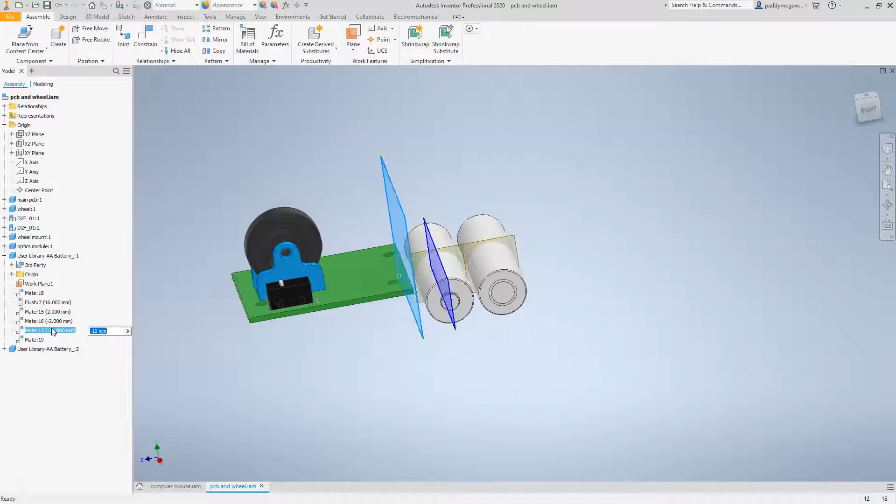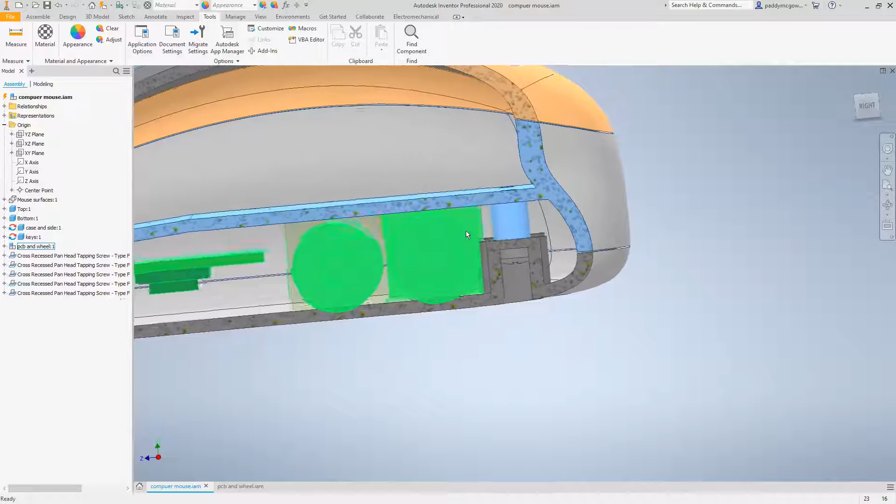That's actually okay, because we're going to be creating a feature around this, so we're going to be adding some geometry onto here. So we're only going to be taking a slight bit off there. Let's just adjust that one more mil, I think that should even it up nicely. Yeah, there we go. Okay.

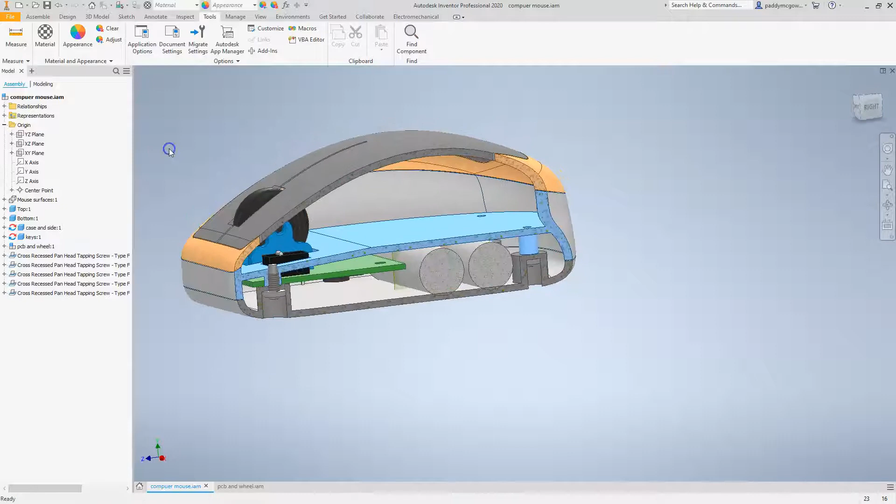Okay, so we're all saved up, and I think the next step then is to do a similar approach here that we did here with this rib. So the next stage in our plan is to do the same up here, so we've got a couple of steps in this one. Let's try that, and we will come back in another video and do that.